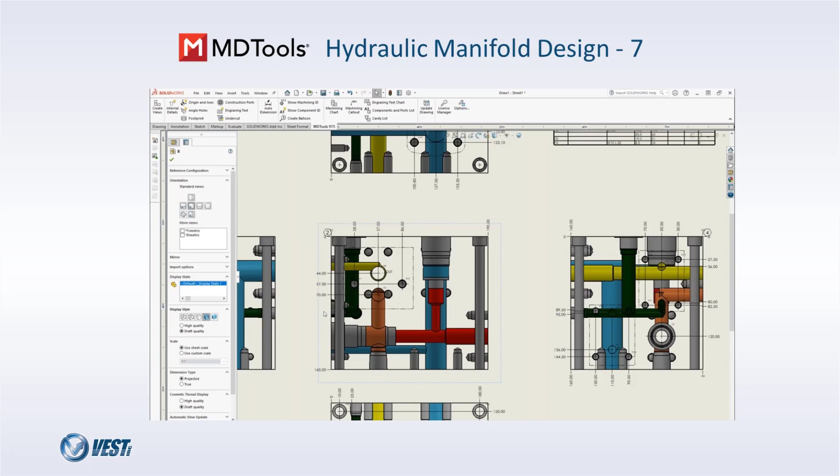Today we'll do a demonstration of MDTools. I will use MDTools on Solidworks as promised. I will try to alternate Inventor and Solidworks versions from next webinars. And like I did in the last demonstration, sometimes I'm starting from HyDraw, other times not from a schematic.

Although I always have a diagram made on HyDraw CAD, today I designed this block without the intelligence that is built in HyDraw CAD. Let's just take a look at the diagram so we understand a bit. It's not complicated. It's just a manifold we normally put on a power unit where we have the pump inlet, a check valve, a relief valve on the pump.

We want to filter, so we have a pressure filter. That's an Italian MP filter, FHB 050 footprint. I want an accumulator. I just had a 3D model of an accumulator, so we will see it assembled on a 1/2 BSP port. We have a shut-off valve, a ball valve, allowing for us to discharge the accumulator if

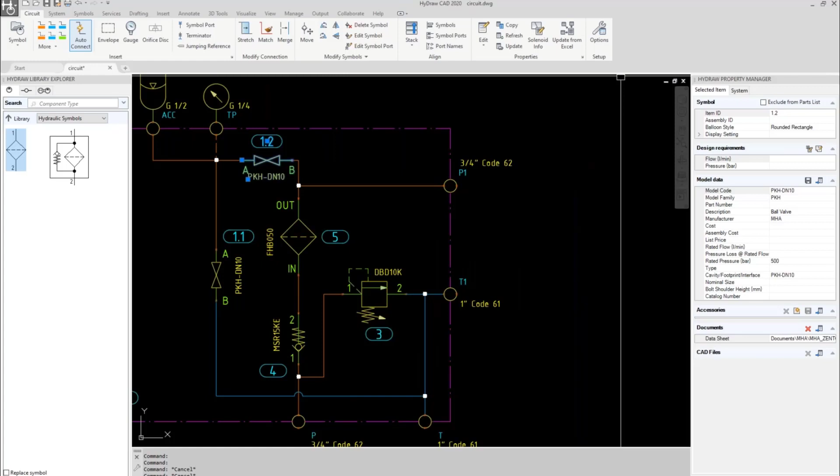we need. So basically we have two MHA shut-off valves, and then we go into the manifold or distribution of our power unit. So this is not complex stuff. Usually we have this kind of manifolds in power units. So we start designing our manifold, and we go in MDTools. I'm using MDTools 975 in Solidworks.

It's still in beta, so I know we have some bugs, but hopefully I will not jump into them during the webinar. But I trust the software, and I did a lot of testing with it, so it should be good. As always, we start with a block, and so the first command is block. Although you could select material and cross sections by material, let me just quickly start with, let's say, 200 millimeter by 160 by 160. The filter is not that small, so then we will try to see if all components fit.

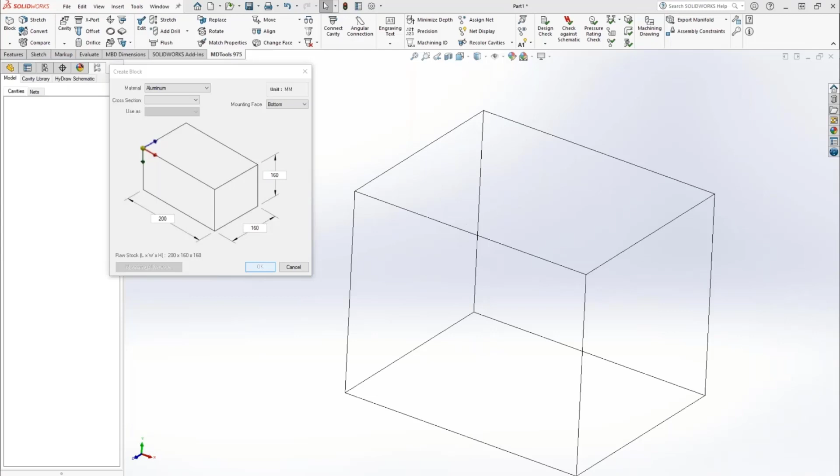Since this will be a power unit mounted manifold, I imagine that my power unit reservoir will be down here. And so I want a through bolt hole for my manifold so that it will be easier to fit into my power unit. When you design manifolds with through bolt holes, it's always tricky to find a place for the through bolt hole. So a good recommendation is start from the bolt holes. So I start with, let's say, M10. With this command, we can just start with adding bolt holes.

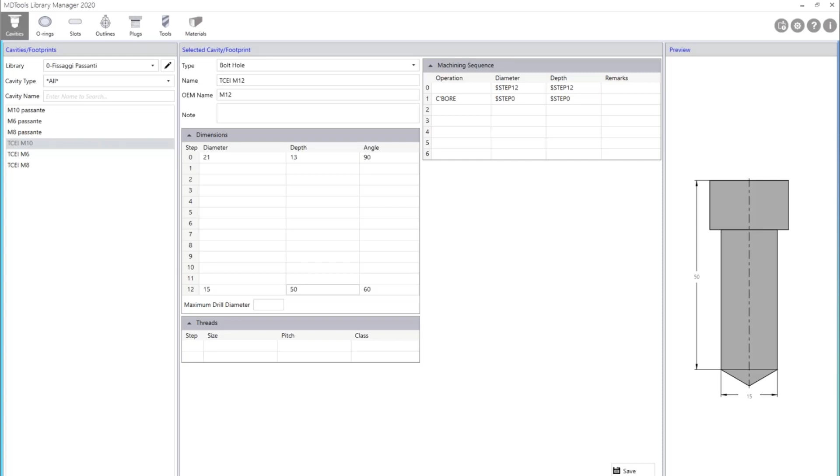I take an M10. If you don't find the cavities you need, just quickly go to the library manager and add. So let's say in this case, I don't have M12. I can go to my library manager. And let me get back here. I go to my mounting holes. I take my TCEI M10 and I can make a TCEI M12, and the diameter will be 21 by 13 by 90, and the diameter here is 15 by 50. And we can do a save as. So by doing this, we quickly create all the geometries that we need by starting from existing cavities.

So basically now, if I create my bolt holes, I will find also the TCEI M12, but I want TCEI M10. 4 pieces on the top face, and I want just 10 millimeters from the edge. When you click OK, now the drill holes are placed. I am now working in feature mode. In the new 975, you will see a faster feature mode. And if we move to the SolidWorks browser, as you can see, we have different icons. We are using the advanced drill hole feature that is available in SolidWorks.

Although this is usually faster in designing than 970, I still like to work in virtual mode when I start the design because I really like initially to try different configurations. So remember, if you want to switch between virtual and feature, you just click convert. You have a warning. This will jump to virtual mode. And if you want then to jump back, you click again convert. The difference, as you can see here in the virtual mode, is that we have bodies and not features. This is a lighter mode which allows faster operation. So let's start placing components, and then we will switch to feature mode later.

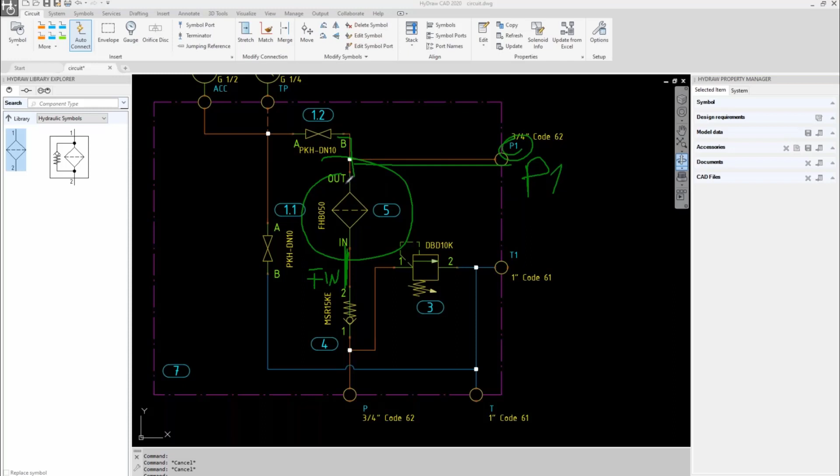So my filter is here, and let's say that this item will be called fin, filter in, and this net, the outlet, will be called P1, just with a port name. So the filter inlet will be called fin, and the outlet will be called P1. So with this in mind, we go here, take our filter. So the inlet will be filter in, the net name is fin, and the outlet is P1.

If you keep using standard net names, they will show up as a drop down here. And these net names can be defined in the MDTools options. Under the cavity color, you can define net names and also specific color for same net name. It's very easy, so you can just click new and create a net called drain and specify a color for that net. Anything you add here will be added and will be available in our net.

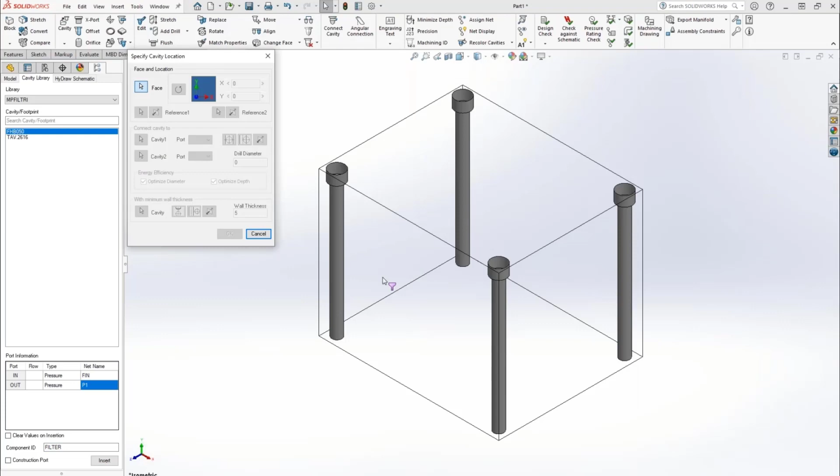So now if I take a cavity, as you see here, I will have also the drain available. Let's go back to our filter, MP filter. So we say that the net is fin and the outlet is P1. The component is filter. Usually we use the item ID in the diagram. In this case, I just use a text filter. It will be easy to find out in my browser.

I place my filter in the drawing and I can select a position, let's say 60, 70 millimeter. It's better always to start with precise position for cavity, so it will be easier to have exact position for all the components. Now, there was a check valve before the filter, and it was a Rexroth MSR 15. So we find this cavity here, and we go to the MSR 15. So a check valve has 2 ports. The inlet is coming from the P from a flange, and we call that net P, while the outlet is going into the fin, so the filter in.

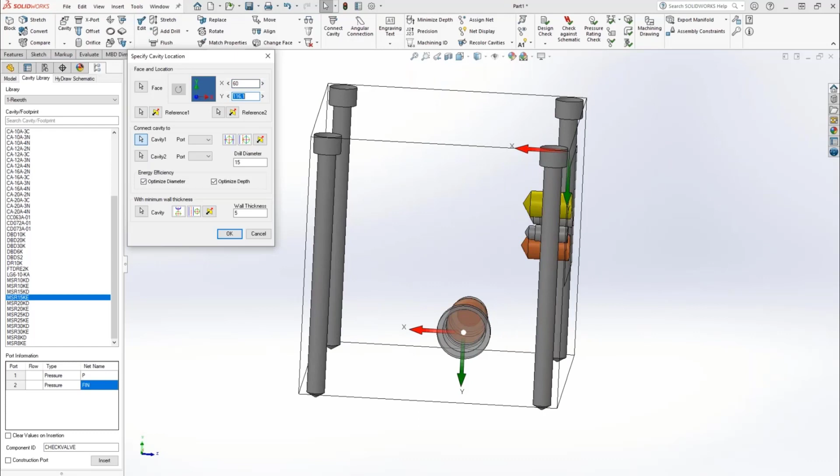Our component is called check valve, and we place the check valve, let's say here. Well, we see the colors. The orange will need to go to the orange, so this position is not bad at all. Let's leave it here, and we position at a good position, let's say 60 millimeter, too far, 50 millimeter, 120. I see that there is not a good alignment here.

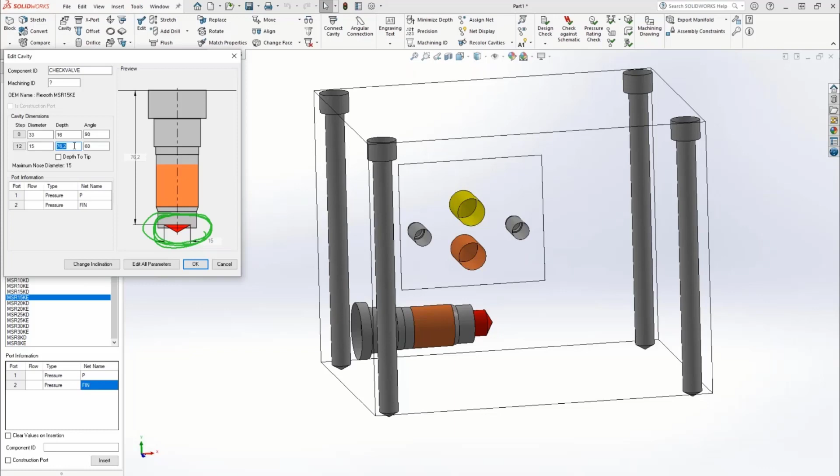This is a check valve that, really quick, we can deepen, sink in the block, so we can add it and make it, let's say 16 millimeters. When you exceed the spot face, as you can see here, we have a warning because the spot down, the bottom drill must be increased. So yes, we will make it 150 millimeters. And now we have sunk our cavity. Looks good.

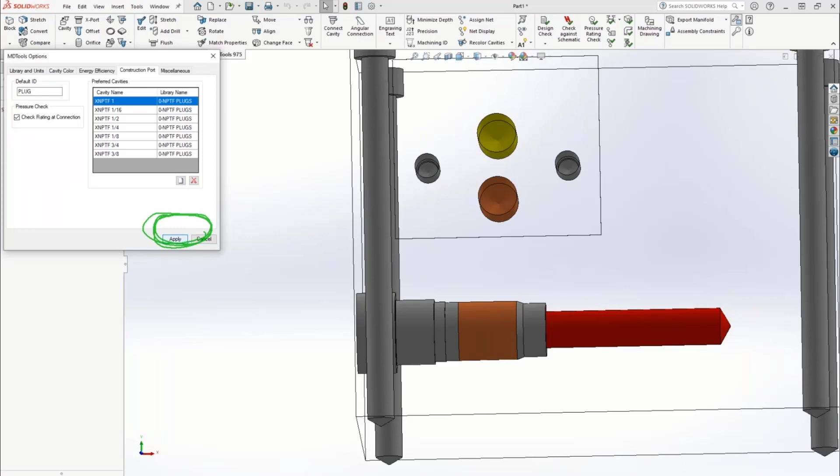So for my design, this is something I never did in other demos. I will use conic plugs, NPTF. So in my construction plugs, in the settings, I will select my NPTF plugs, all sizes, add. So in my design now, for all the construction plugs, I will use NPTF. Another setting that we have in the library is that for the plugs, all my NPTF plugs do have a corresponding SolidWorks file. This works also for Inventor, no problem at all.

But as you can see here, we have linked the cavity with the corresponding 3D model. So we expect the automatic plug assembly at the end of the design process. Now we need to connect the orange one. So we make a construction port, connecting this, and we position automatically. It is taking half an inch NPTF. That's good for the size. And I put it here in the center.

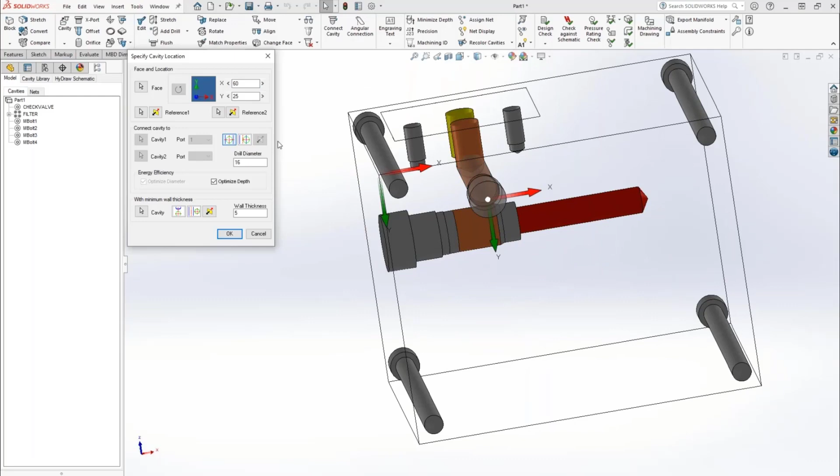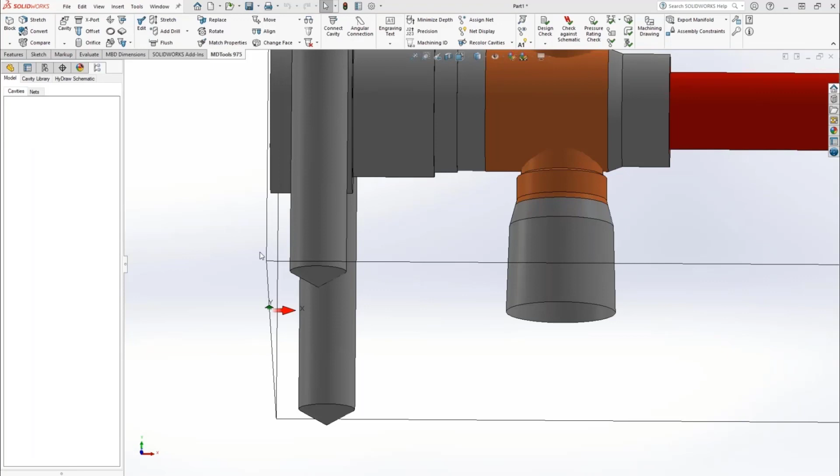And I want to center with the other cavity, so we can reference to this cavity at 0 on the Y. And as we see here, there will be a possible intersection with the dead area. So let's move on the X by 1, 2, 3 millimeters to the left. So now we have made our connection, orange to orange. It's not aligned. If we want and we have room, we can align these two cavities. So then we have a center to center.

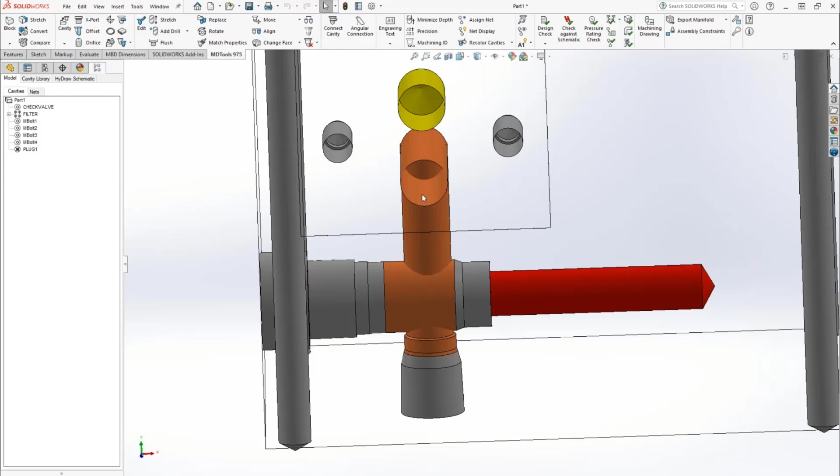As a general recommendation, when you design a block, wherever possible, always make center to center connections. Your manufacturer will thank you. Sometimes it is not possible, so of course there is always a compromise, but really wherever possible, try to make center to center connections.

The inlet of our check valve is a flange, so we go to our flange library. That was a 3/4 code 62 flange. The net name, now that we have some nets in the block, we can switch off the show all. So when you switch off show all, MDTools will show you only the nets that are available in your block. So I take the P net and my port is P.

And we insert here, we can rotate it, and we can position reference to the center of the cavity. As you see, when we click reference to the center of the cavity, dynamically we have a new origin here. And to make it aligned, just use the XY. So here you put 0, 0, and now the drill is in the center. You could control the diameter. 19 is good for my flange, so nothing has to be made here.

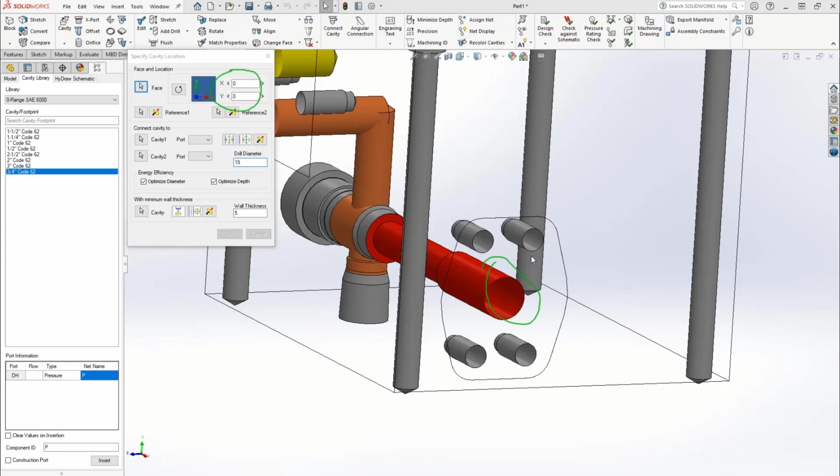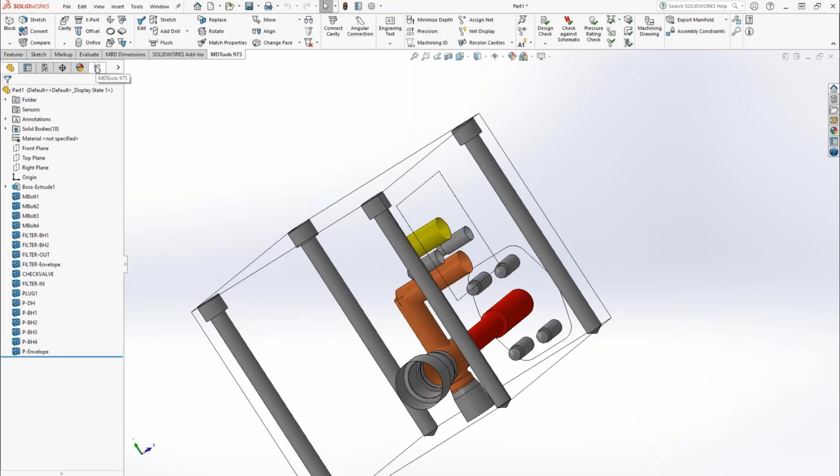Please remember that in virtual mode, we don't see the real geometries. We see the drills, entire drills, because as I explained before, we use the multi-body technique. So basically every cavity is a unique body. We will transform into features later in the design.

Let me save my block, and let's put it on the webinars, MDTools. That's our, okay.

And now we have also the tank lines. So we imagine that there will be always our reservoir down here, and reservoir means tank line. So let's plan to put the flange down here, the tank flange that will be directly connected to the tank. But after our manifold, there will be other needs, maybe another manifold somewhere else.

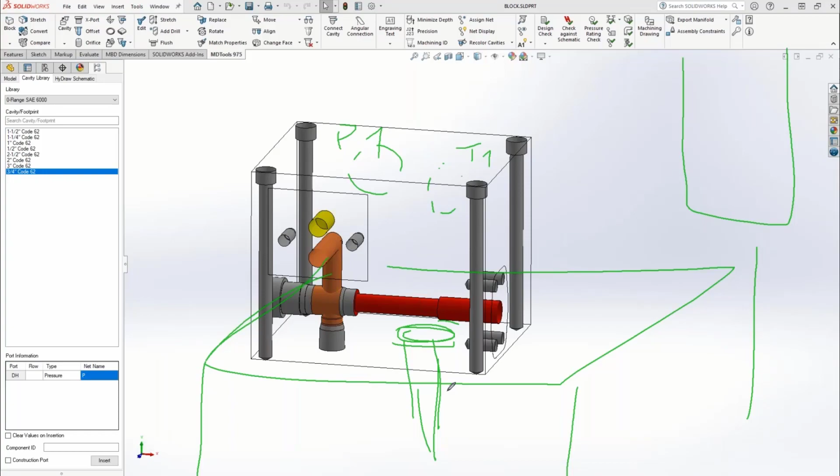So on the back of the manifold, we will put our T1 and also our P1. If you remember the schematic that we had made, we have the tank going to the reservoir, but then we have T1 and P1 that will be connected somewhere else in our system. So we need a good layout for these ports in our manifold. So let's plan to do it.

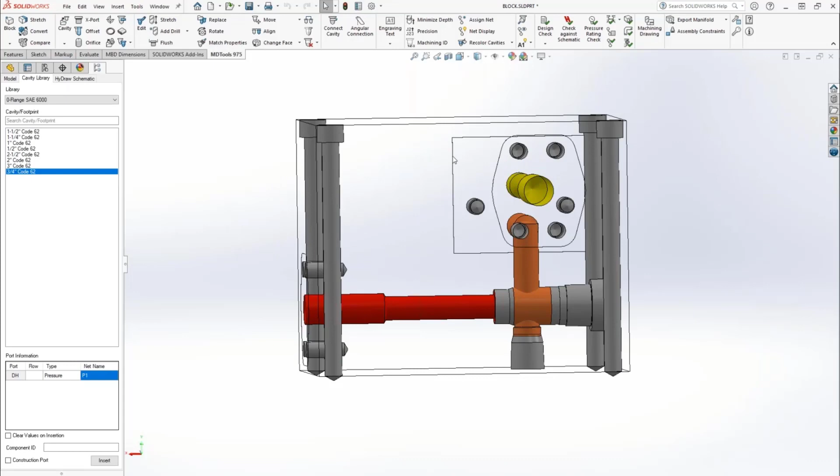We take our P1. So the net is P1 and the port is P1. And we place it on the back face. Yellow with yellow, so it makes sense to put it in the center. Let's rotate it and reference to the other drill in the center. And we can make the connection by stretching one drill.

Please remember, connect cavity is not working with the coaxial connection. It will work only with the 90 degrees connection. So when you want to connect two parallel connections, you must use the stretch drill command.

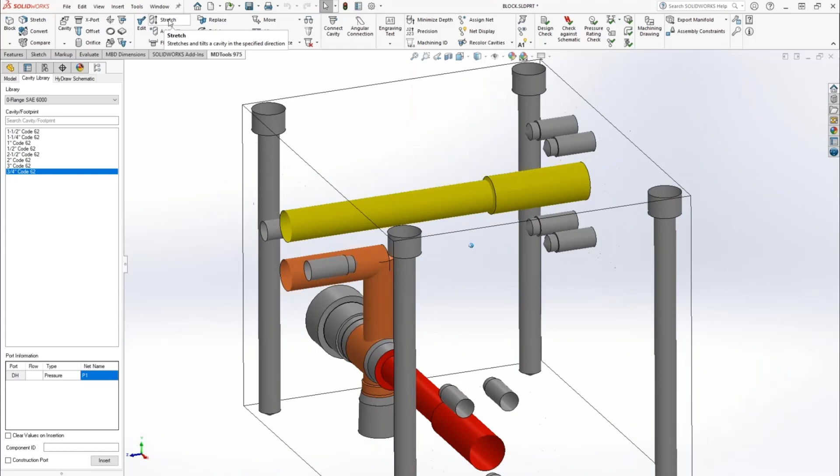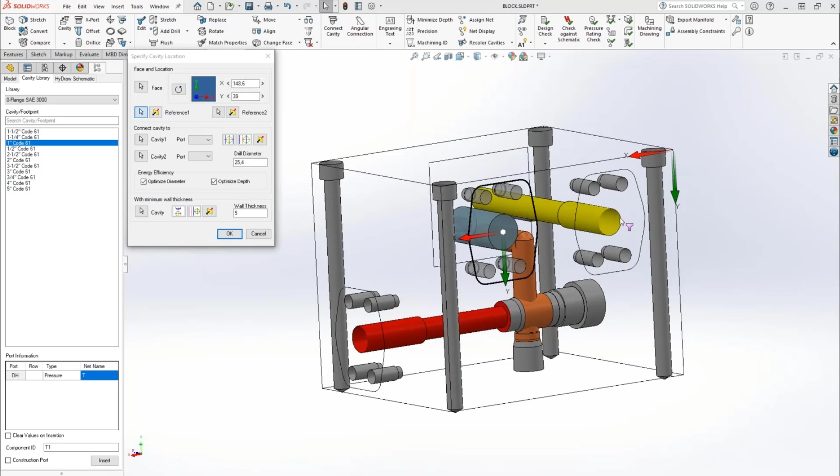We go to the SAE 3000 and we take the 1 inch 61. The net is tank, and this is T1, which we put somewhere here. Let's put it aligned to the other cavities, rotate it, and we put a reference to this cavity at 100 millimeters, 0. That's too much. Let's keep it 80 millimeters.

So in industrial manifolds, sometimes we really do not pay too much attention to how small the block is, because it's very important to be able to maintain, to replace items. So sometimes the industrial manifold is larger than what you expect on compact hydraulics, because really the need is different. Here we don't mind if there are some kilos more in the manifold.

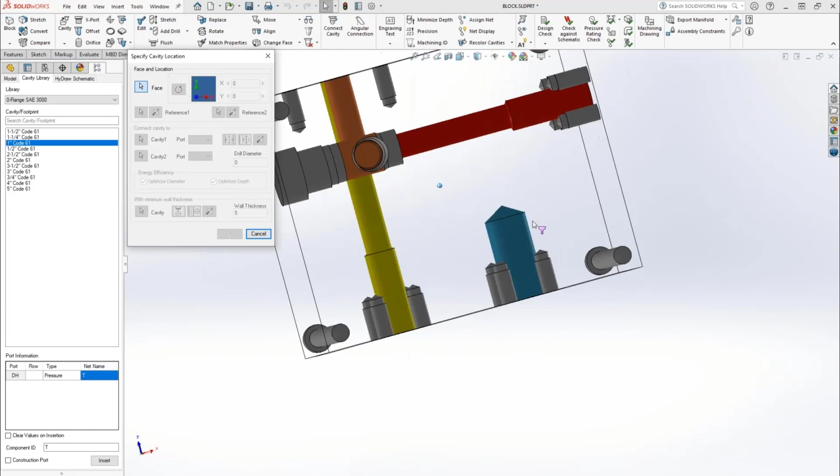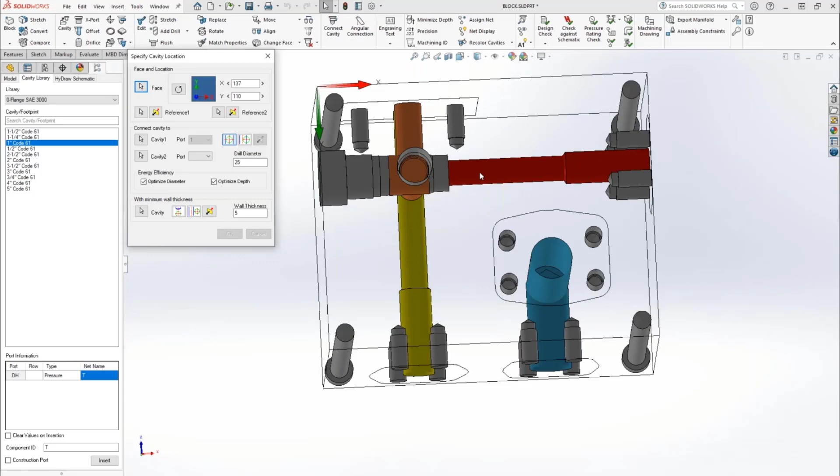And let's say T1, that's tank, our tank. As I explained earlier, we want to put the tank down here. We want to connect to the tank line in the center, and on the Y we put it 110 millimeters. Always pay attention to X and Y. It will save time with modifying later the position of the cavities. So that's our tank line, and that's good.

Now we have made the skeleton of our block. We have the pressure entering in the check valve, going to the filter, goes to the system, and then we have a tank returning back. We have a relief valve on the pressure line. That's a Rexroth DBD10K, which is basically connecting the P line to the tank line. That's our relief valve. We put it on top here.

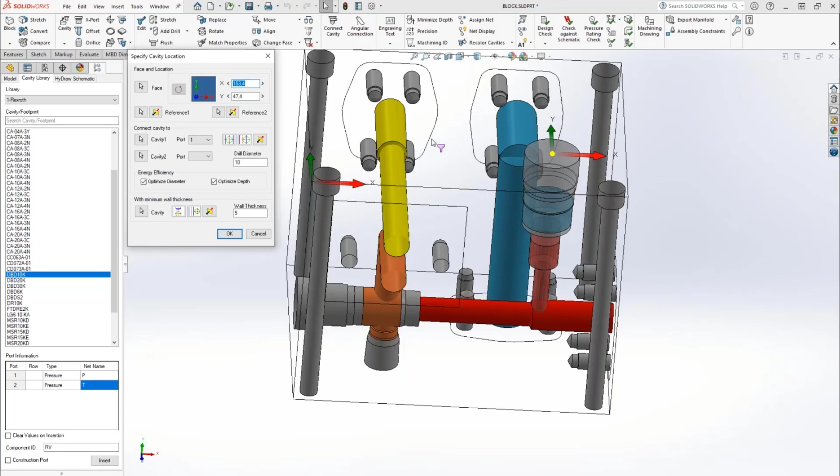Let's connect. And again, we can consider using the flange to connect here. So we can just position it in reference to this drill. And as you see, always dynamic change of the position. X we put 0. And on Y, we want to change reference here, so to have exactly center to center to the check valve that is down there. Okay.

Now, instead of adding a construction port here, we want to connect directly the flange here. If we just connect, this will reduce the drill of the flange, which we don't want. So we want to add an additional drill to our cavity. As a generic rule to help manufacturing, we want to extend the large diameter in order to get out of the first intersection.

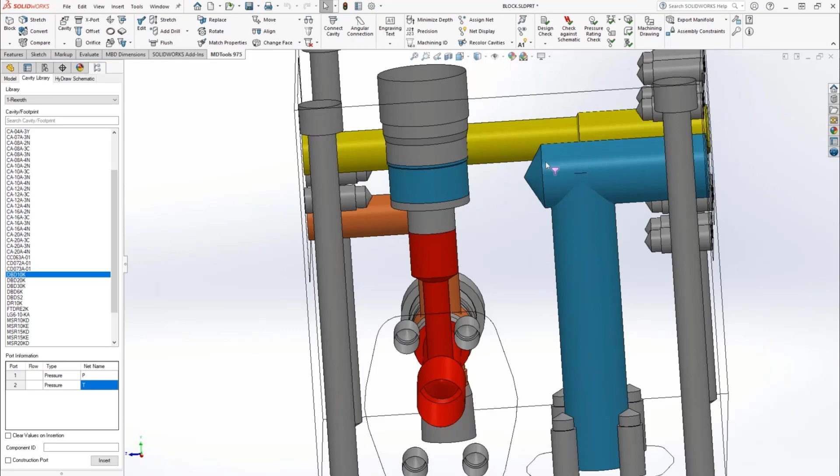And let's say we want it to be 65 millimeters deep. Let's make it 25, the diameter. So we want to extend, and then we started with the smallest drill. That's a good recommendation, because we want to have a clean center for the next drill that is coming in the operation of the block.

We add a new drill for this cavity, and we don't mind which size. Later the destination cavity will be controlling it. Let's make it 15. Now MDTools is asking where I want to position this drill information. So let's leave the drill operation here, and it will be combined with the primary drill of the footprint. The depth, let's make it 10 millimeters. No problem. It doesn't need to be precise here, because later we will do the connect cavity.

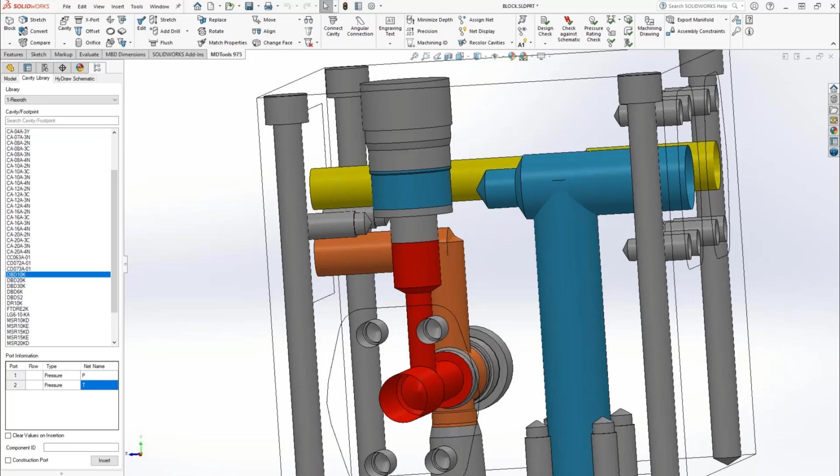So we click OK. Now MDTools is transforming that cavity into a multi-step cavity. In fact, with edit, now we see that our profile is made of 2 different drills. And now we can do the connect cavity here in the center.

And that's okay. Let's check the diameter. Let's say that we want to have a 14 millimeter diameter in our drill, but as you see, the destination drill is conditioned by the cavity. That's good. Let's move quickly, otherwise we run out of time.

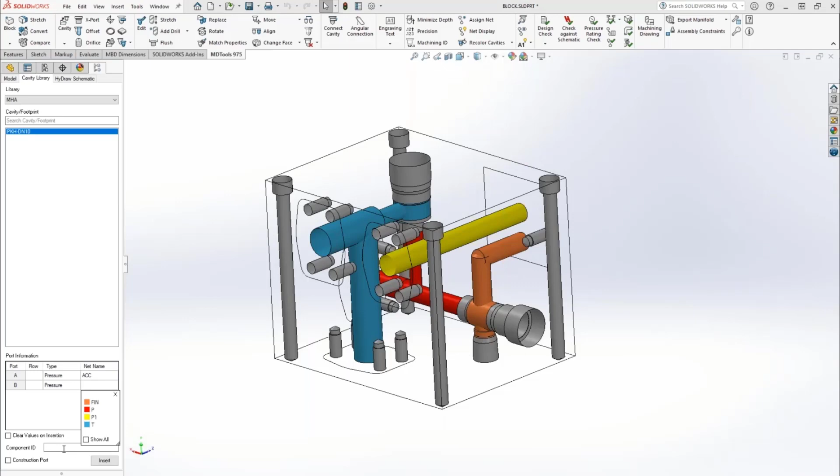We had ball valves, MHA. The ball valve is the N10, and it's connected to the accumulator. So net A is accumulator, net B is P1. It's the yellow connection, and that's the ball valve 1, and we position it here. So we want the accumulator to be on the top face, so we need the top face to be free. We put the accumulator next here.

So let's rotate, and let's move this ball valve. So we can drag the position and put it here, and let's make it 80 millimeters. And we want to connect these drills.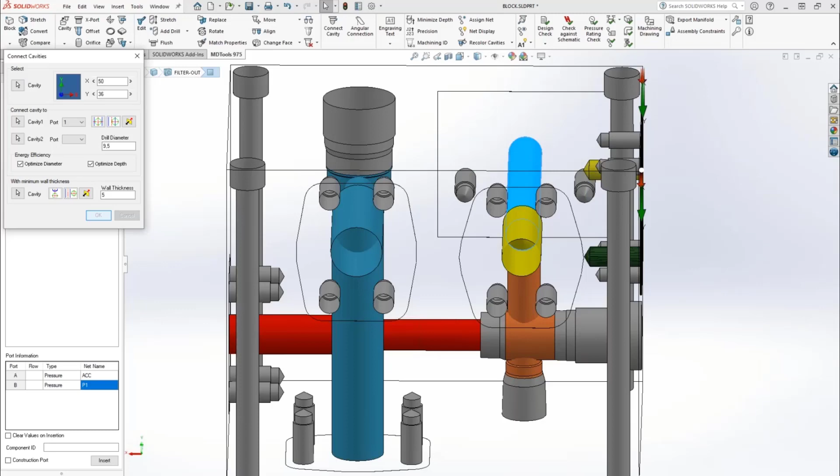The green one will be our accumulator, which we want in the center here. So let's go for a BSP port. The accumulator was 1 inch. The net is always accumulator, and we want the accumulator being here. And let's leave it at 25, 80 millimeter, 90 millimeter.

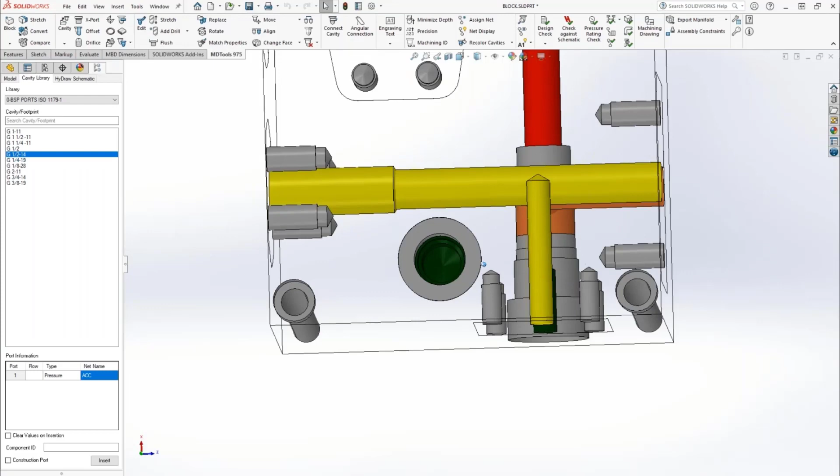And we want to connect them. And here we don't seem to be able to find a good room, so let's try here. This looks better. We want a construction port here with this drill, and it's a 1/4, should be okay. And we position it here. There is a bolt hole there, so let's move to the right. And we click OK.

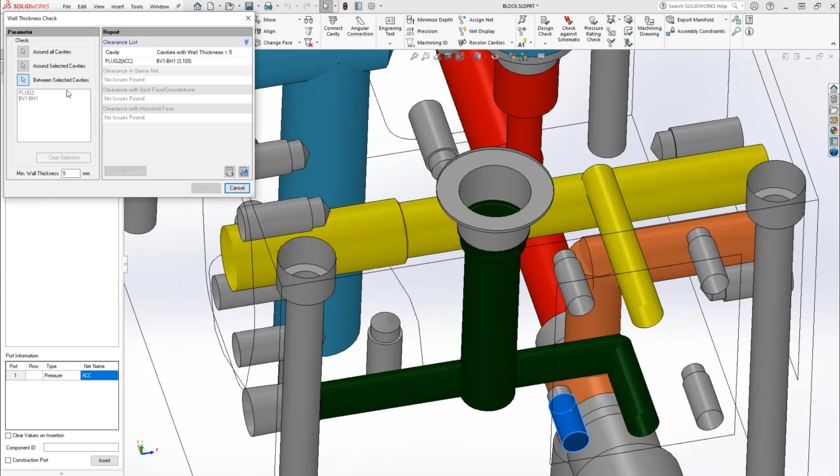If you want to verify the wall thickness, you can just do the wall thickness check for all the block or between or around selected cavities. So let's make it between these two cavities. We want to verify if there is at least 5 millimeters. And here it is 3.1 millimeters, so that's not good. So we need to get some more material here.

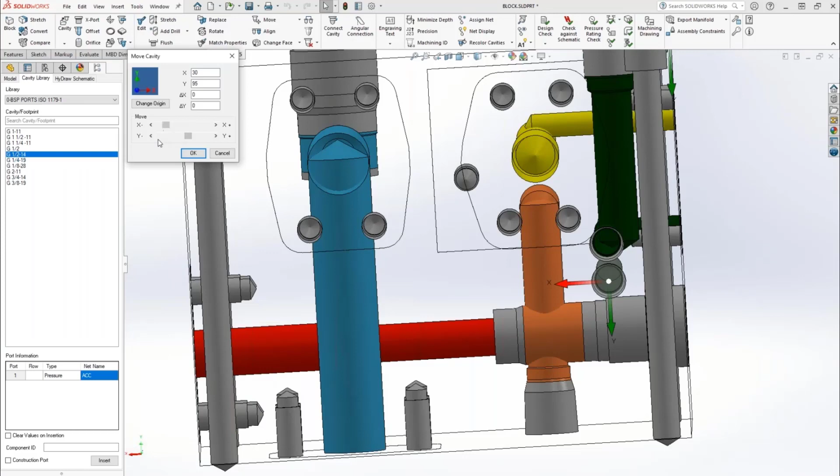So a technique could be we move this drill down, not too much, and we make an inclined drill. So we take this, stretch and incline. We go with inclination to this drill, and let's make it 20 degrees, 16 degrees. Now this looks better, and we can stretch this drill and go and make the connection here.

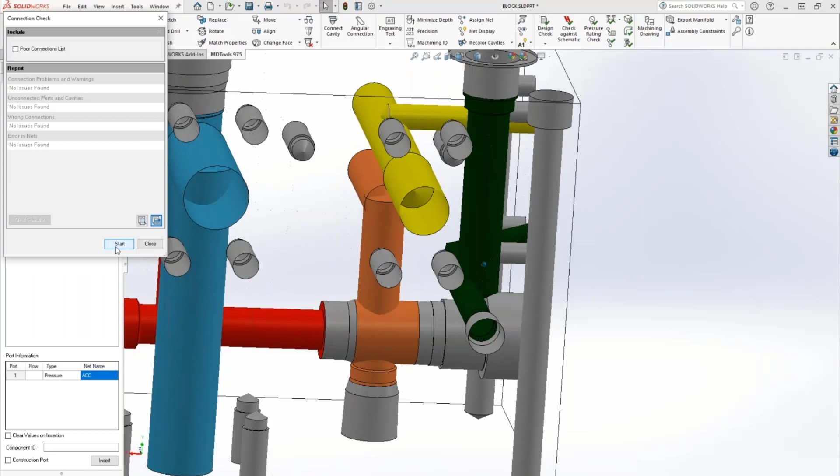Let's check our schematic. So we do a connection check. With a connection check, we can verify if we made mistakes. Graphically, we don't see any mistake here, but by mistake, there could be an intersection between a cavity with a bolt hole. So like in this case, I am touching bolt holes. So when we do a connection check here, then we have problems. A bolt hole and a port are connected. There are other mistakes that we can make, and let's fix it.

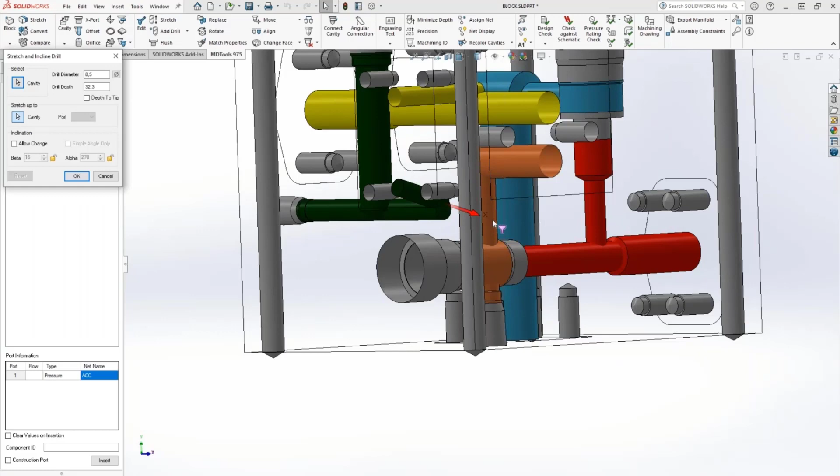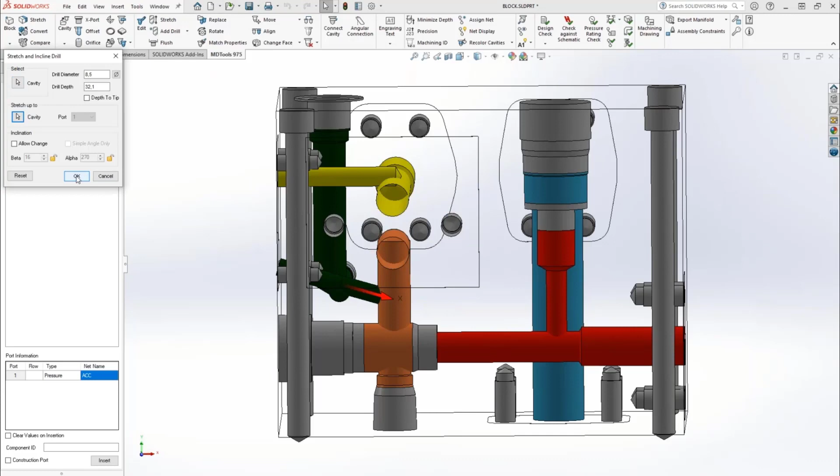So for instance, we could have nets that should not be connected together. So like if we extend too much the green drill, then if we do the connection check, this will end up with a wrong connection. So two drills belonging to different nets are connected. Let's get back to our connection, stretch up to this connection, and we make it 32 millimeters. That's good.

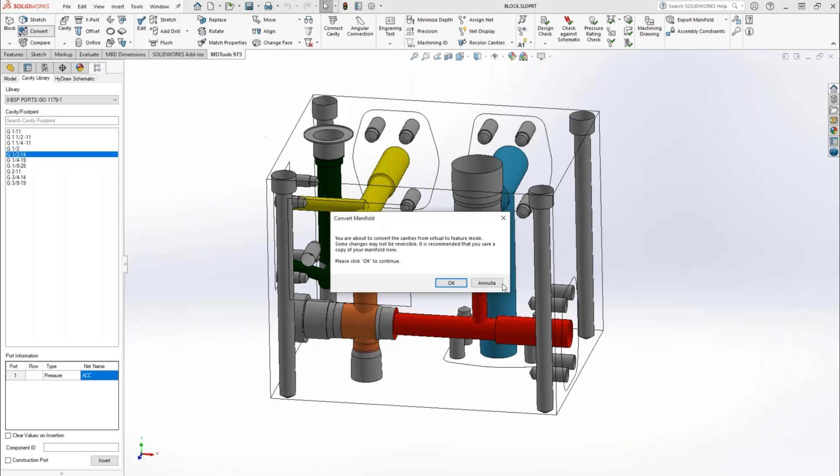Let's start placing the components. We still miss another ball valve, but let's try to make the feature mode; we want to start building the assembly. So to make the assembly with the MDTools rules, we must convert to feature. So when we click convert, MDTools will ask you if you want to convert the block, and we are going to make our feature block. So this operation will take a few seconds or a few minutes, depending on the complexity of the block. We improved a lot the speed in conversion with 975, so this will not take much.

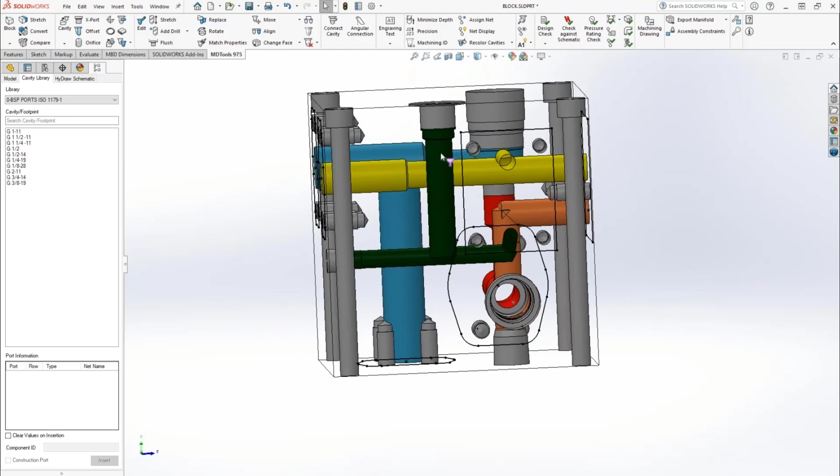And if you remember, we had a ball valve on the accumulator that was connecting to the tank. Actually, that ball valve could fit here, and then we'll check with the lever in the assembly. But let's start making the assembly. So we save our block and make the new assembly. And then we get back to the design.

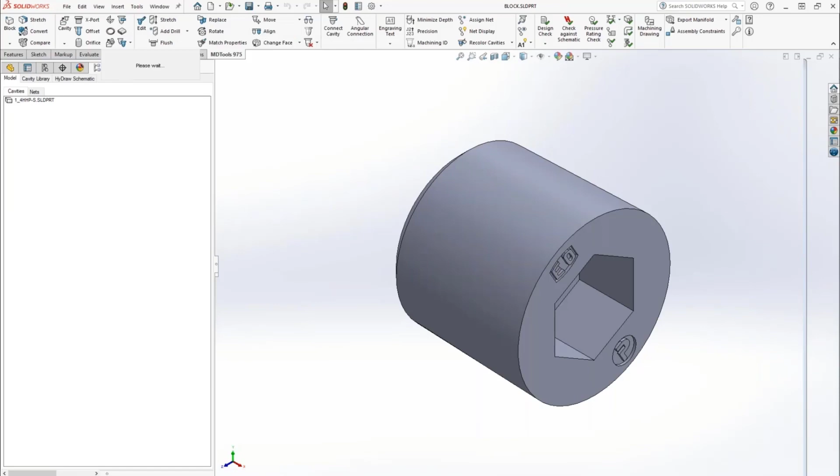MDTools provides commands. As I showed you in the library, I have linked the 3D model of the plug with the plug cavities. So if we run assemble plugs on our manifold and take the block, which is here, now MDTools will find all the cavities that require a plug, and will just load the plug in the corresponding position. This block has not many plugs, but for a block with many plugs, you will save a lot of time. So only 2 plugs here. One is here and the other is down there.

Now we want to assemble ball valves, filter, relief valve, and so on. So let's do it. We can do the assembly interface. And for the check valve, we want to look into the Bosch Rexroth M-SR15KE.

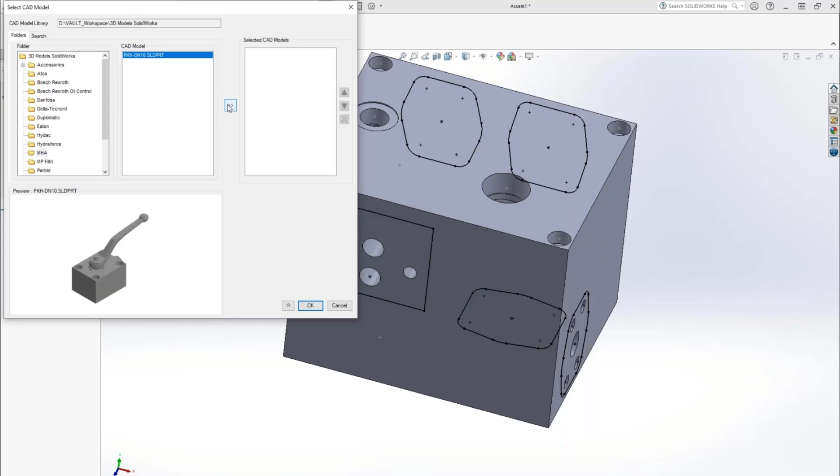For the ball valve, we need the MHA PKH. And on the accumulator, we want a fitting G1/2, and also we want a HYDAC plug SBO. This is one I used in the past for a design. Okay, and the filter, Select CAD Model. I have an MP filter.

When you are done with all the links, you can click update. And now MDTools will take the components. When loading with the MDTools interface, you will see each file loaded twice. No worry, it's just an integrity check that MDTools does, and then it positions the components into the assembly. It will, in any case, save time because all the components are automatically mated and assembled to the block. So now it will start placing the components.

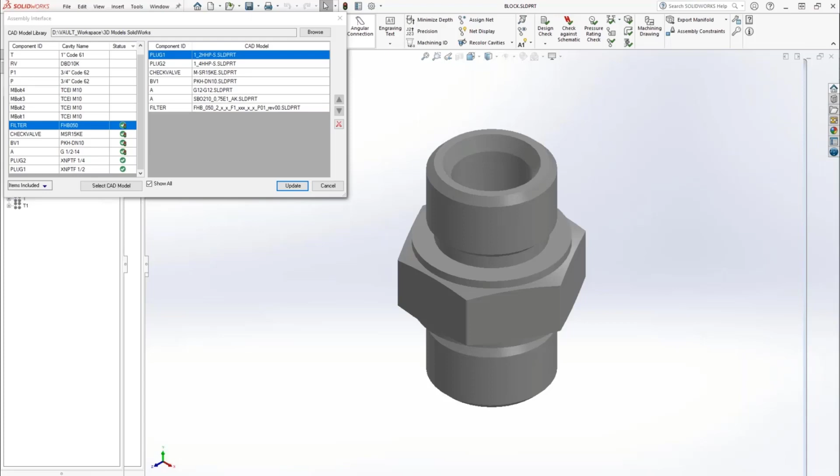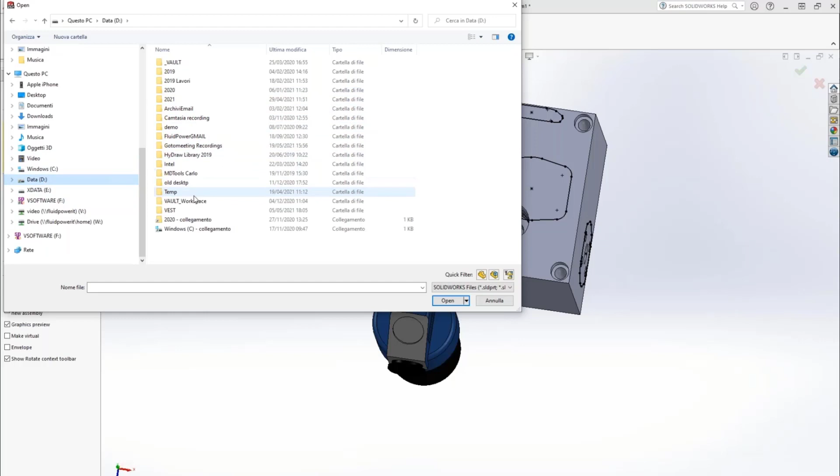Okay, this is our assembly. If you want, you can still assemble with the standard SolidWorks commands, so you can insert components from any location. Like in this case, I have all the 3D models in my Vault workspace, Rexroth. Of course, everything that you do normally with SolidWorks will work, but then you will need to mate the components. So maybe selecting and placing could be faster, but then you need to mate components.

So you need to find the surface and apply, and then, not the dot, I want to mate again the cylinder with the cylinder. So technically you can use any SolidWorks command to assemble.

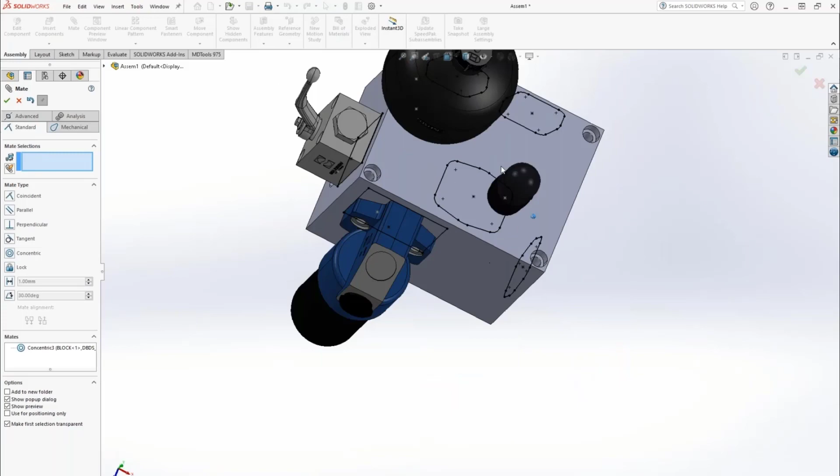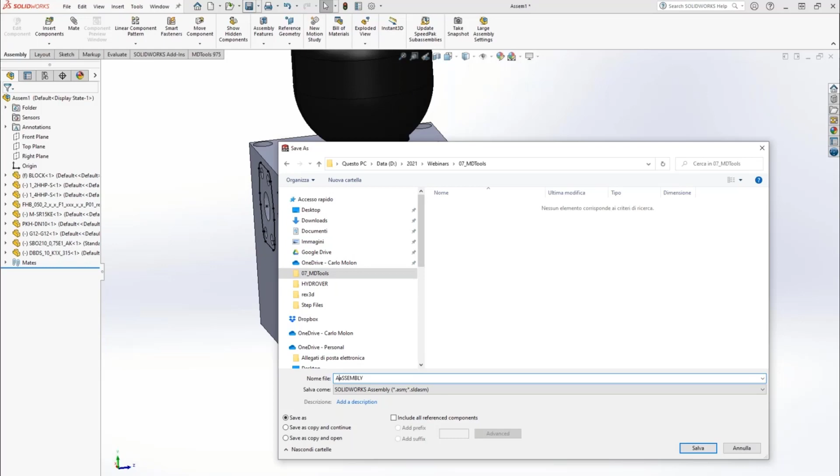Our block looks okay. We forgot a ball valve. So let's save the assembly, and we go back to our design folder. So we can go back to our block, and we can place our MHA footprint. And now this is connecting the accumulator to the tank, so it's to discharge the accumulator. And the component is ball valve 2, which we can position here.

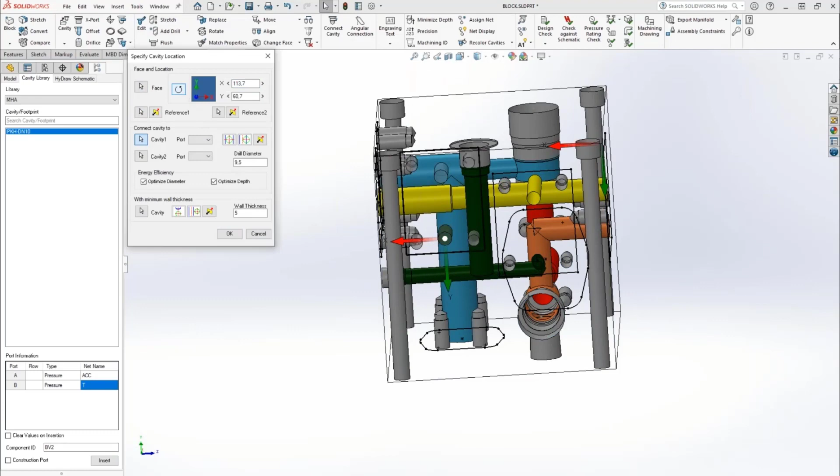And let's rotate the ball valve. Let's try to move it down. Actually, we can connect directly with the green and move it this way. Let's see if we can fit it exactly down there. We can align the drills, always with the idea that we should make center to center connection, and we can make the connection here.

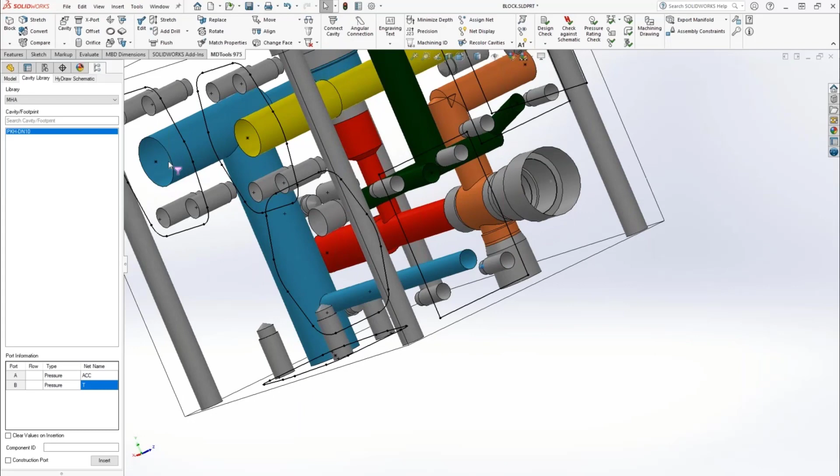We go back to the assembly, and yes, we accept. No major error. We didn't move anything in our assembly. Now we want to assemble the other ball valve. So always with the assembly interface, we take the other ball valve, MHA, and update. So this will automatically assemble the other ball valve. Now the lever is not in good position.

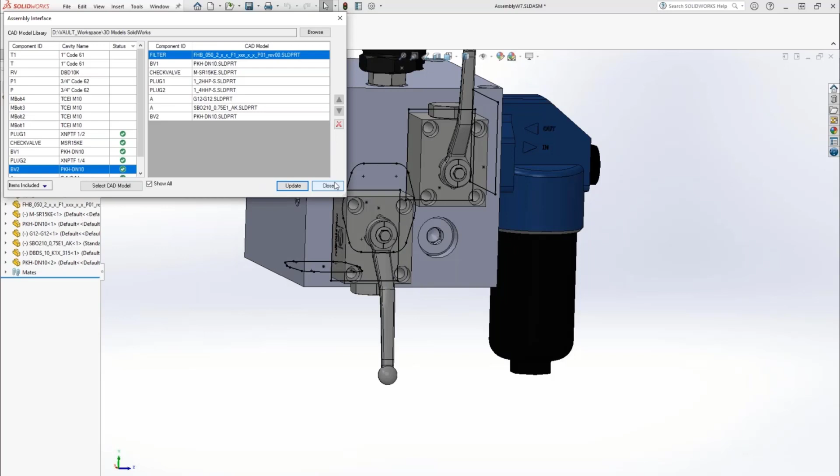So I'm using now a functionality of SolidWorks. I made some configurations, so I can select a configuration with lever 180. So this will apply the lever on the other side. And this is a standard SolidWorks component. So this is a demonstration that it's really integrated in SolidWorks, so whatever you do with your components can be done. So here I want the lever at 270 degrees. And we leave the levers this way.

We may need engravings on our block. So let's go back to our block. And so with engraving text, we can select a cavity, touch a face, and position the engraving here. So that's, for instance, our T1, which we want to position exactly at 145 and 90 millimeters. Engrave. And so on, we can go on to the other ports. P1.

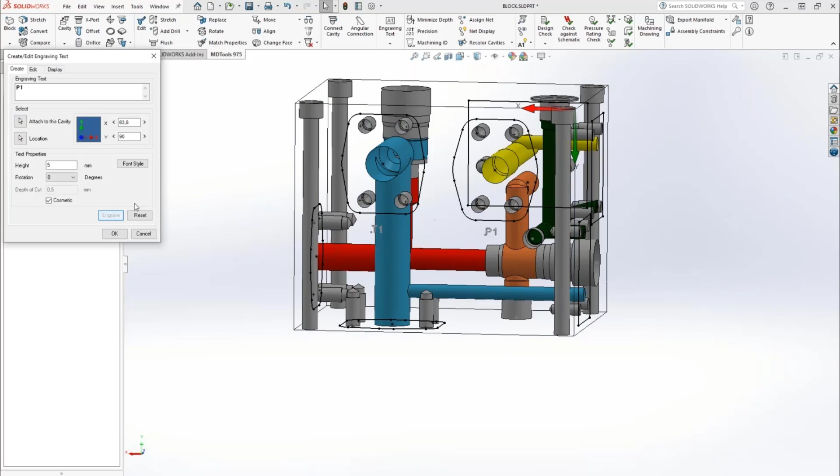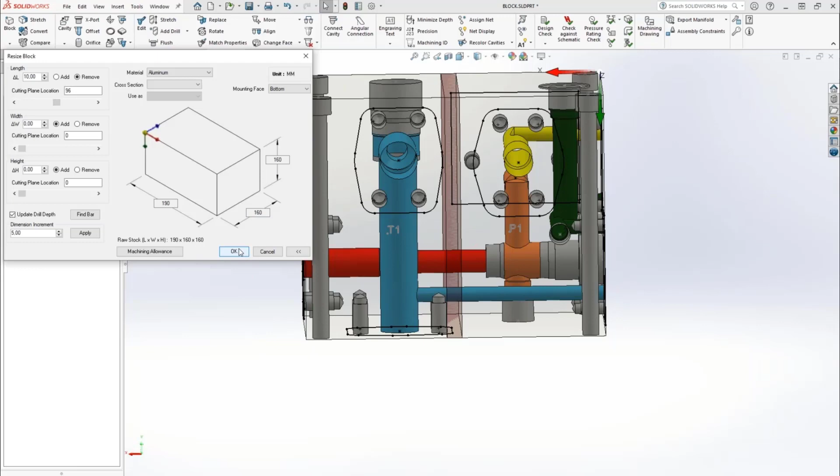Engrave. And so on. We also have the possibility to compact the block a bit. So we can see that in the length, we can remove material. So by clicking the block command, we can drag this and remove maybe 10 millimeters. Let me bring it back. Here I expect some problems, but we will fix them later.

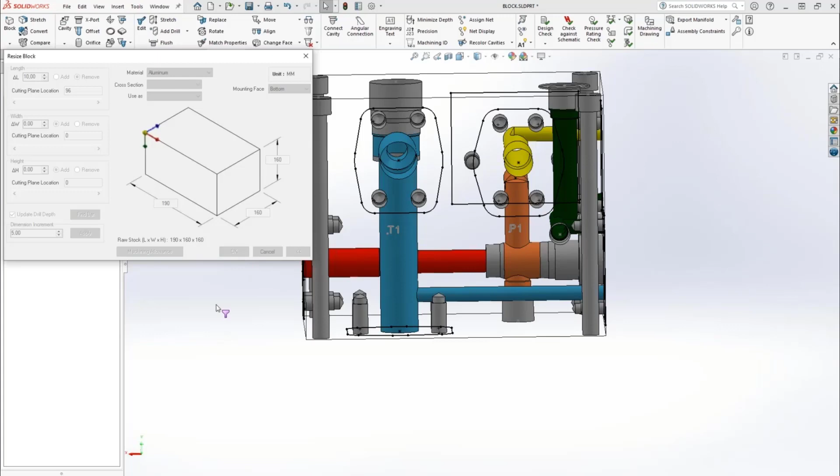So this operation has a small bug in 975 beta. This operation will automatically remove material in between, and it can be used also to add material in between a block, and it will keep a consistent connection. Here it is. So the bug I was referring to is that the footprint is not following. So I just align now these two cavities.

Again, if you see lost colors, just add them, but this will not happen in the production version. And we do connect again.

Stretch. Sometimes you may have, this is typical to SolidWorks, a Revolve Cut feature. In that case, just by adding 0.01 millimeter to a profile, it will have cavities. SolidWorks is a bit particular with zero thickness geometry. So if you find cavities not showing up, you can just slightly change the position by 0.01 millimeter, or just change the diameter slightly, and that will work fine.

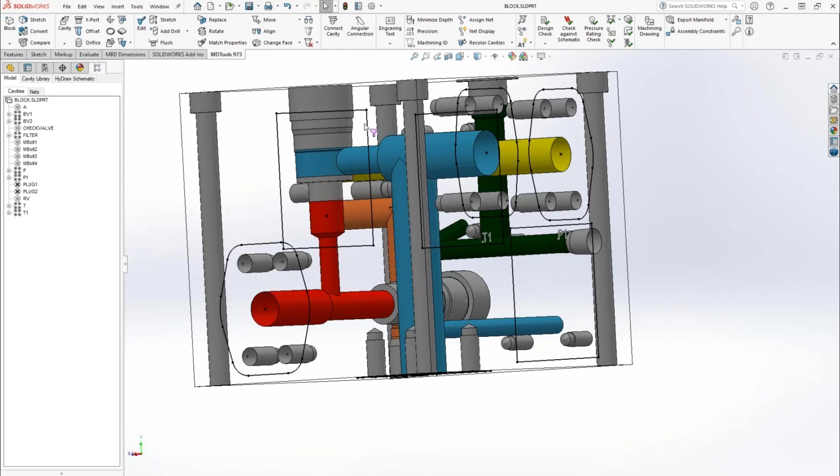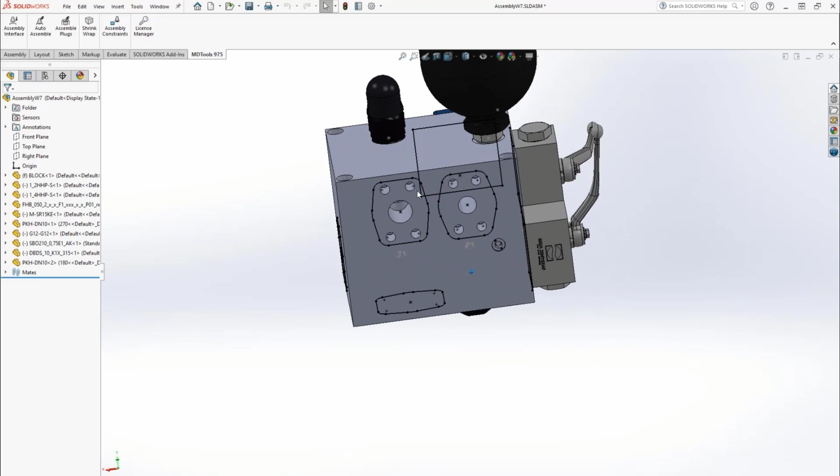So now our block is okay. Let's look at the machining drawing. Of course, if we go back to the assembly, it will require an update. No problem. In this case, we are not doing anything fancy. The block will update. Please remember that if you change face to a cavity in a block, with MDTools commands, you will be able to make that cavity follow the new position in the assembly.

If we want to make the machining drawing, let's do that. We take a paper, let's say A1. We do a create views, and we select our block. And we can define the type of projection. Let's leave these settings as they are. So with this command, MDTools is placing all the views of my block in the drawing. We see that it fits.

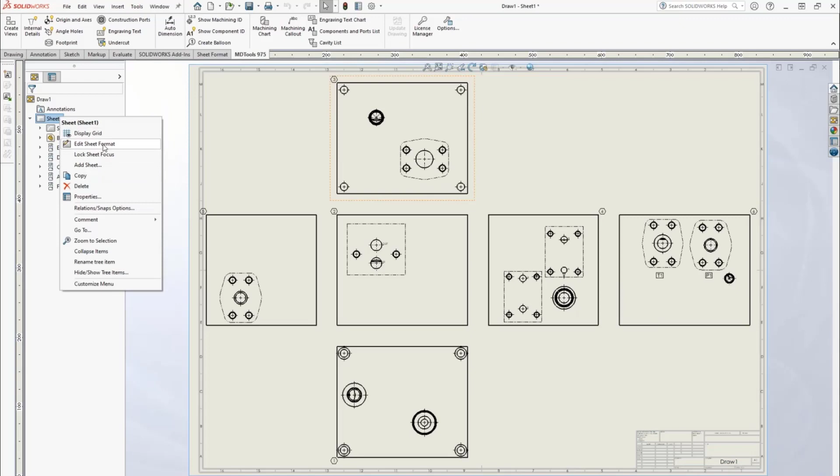So let's change the size a bit. Sorry, not here. That's the sheet. Properties, and we make it A0. So we have room. We can move views all around. All the views that are placed by MDTools have some characteristics: in, out for the filter, A and B for the ball valves or for the footprint. All the construction ports are marked with a cross.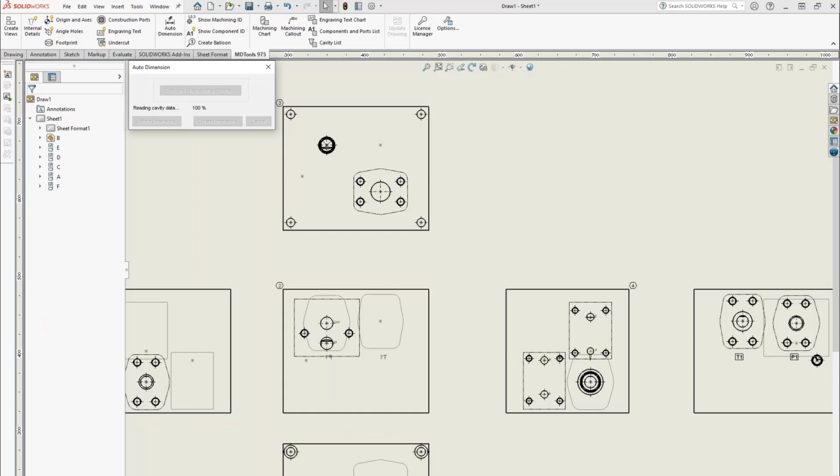We add dimensions with auto dimension, and this will add all dimensions to our block. In this case, MDTools is adding dimensions following your SolidWorks standards, and they are ordinate dimensions from the X and Y origin of the block.

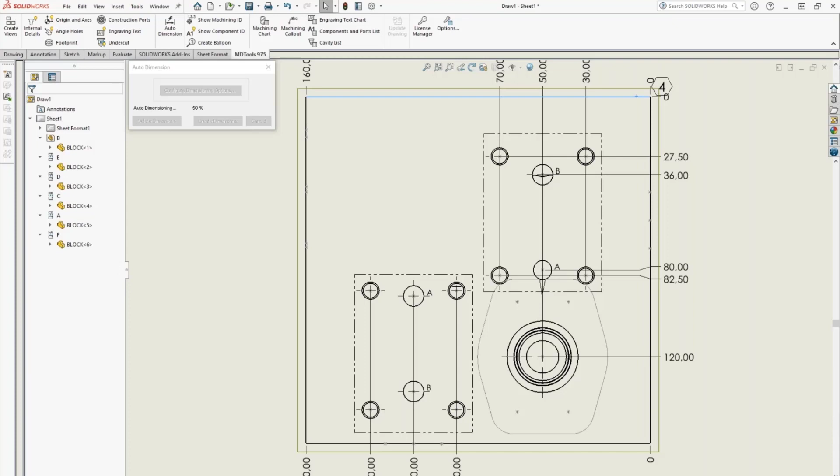As you see, I have good dimensions for my drills, although I did not really focus during my design on the position of the drills. Really, if you pay attention when you insert a cavity and define the position and then use the align command, then you will end up not having many cavities to move in the block after making a machining drawing.

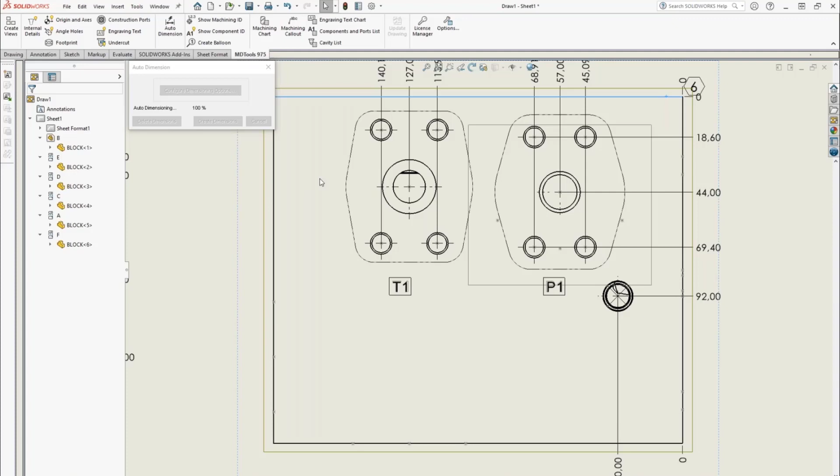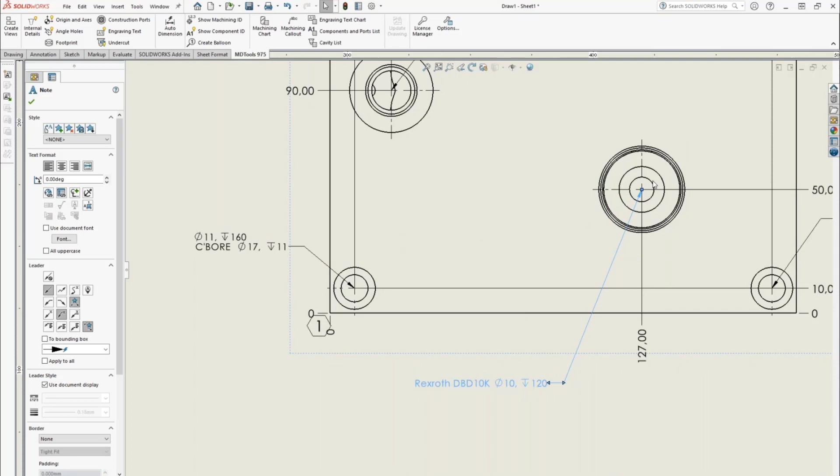Now that the dimensions are finished, we can add machining callouts on all the cavities. That's one option. If you want to view all the information for the cavities directly with leaders on each cavity, then you go for machining callout. The only operation you must do is just move the cavity. So Rexroth DBD10K with a 10mm by 120 deep, and so on. Or if you prefer the drill chart, and in this case, let me opt for a drill chart so I can delete all machining callouts.

Before doing the drill chart, I will move to my block, and I want to assign machining ID. So this command will give each cavity in the block a unique ID. So let me stay with this numbering scheme: a letter for the face, a letter for the cavity, and a number for identical cavities in the same face. So this command will assign to each cavity in the block a unique ID.

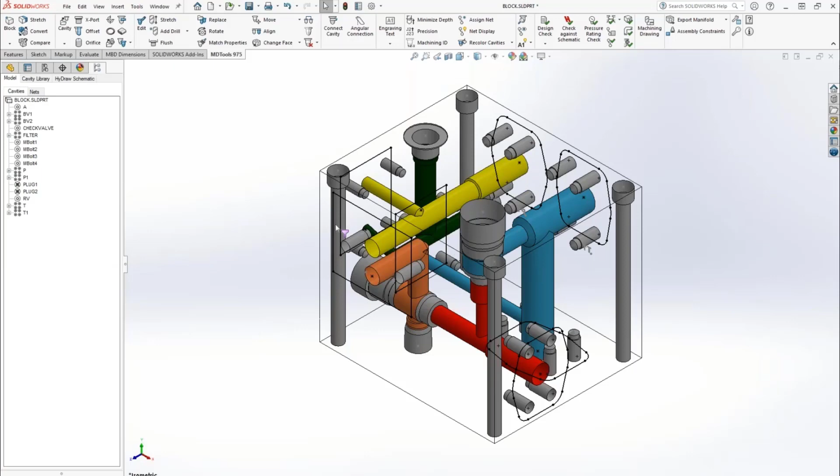We go back to the drawing, and now we have the possibility to show machining IDs in the drawing. We can say show machining ID. So this command will display the machining ID for each cavity in the drawing: AB1, AA, AC, and so on. And each face has a letter, a letter for the cavity, and a number for identical cavities in the block.

Now we can make the machining chart. Of course, it is possible to customize it. I did a webinar recently showing how to customize it. Let's take my default. Let me just verify one option. Okay, the option is good. So I take the MDTools default, insert, and place my drill chart in the drawing.

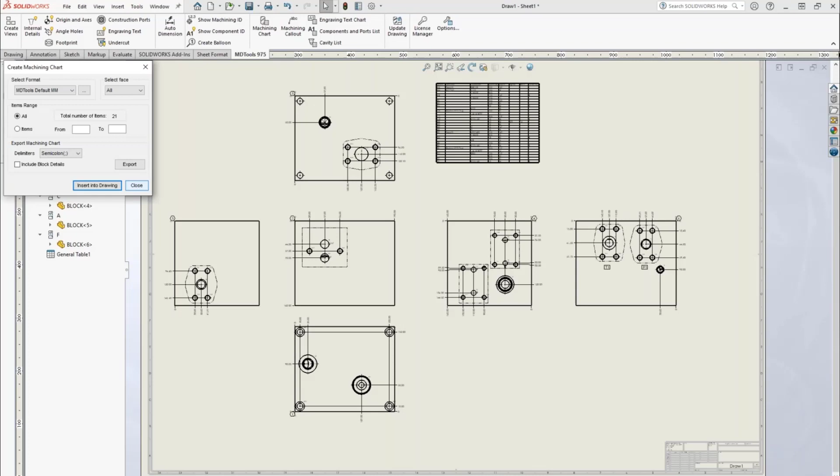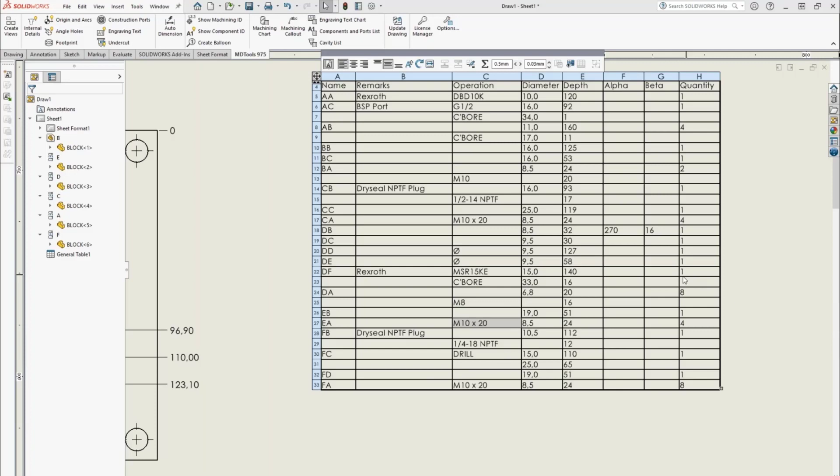So in this case, it's a very compact drill chart because I'm using the quantity. I'm grouping identical quantity. So I have CB, a Dryseal NPTF plug. But for instance, on the D face, I have 8 drills, 6.8 by 20, and M8. So the bolt holes for the flange. And again, it is easy to handle a compact drill chart if you group identical cavities in the block.

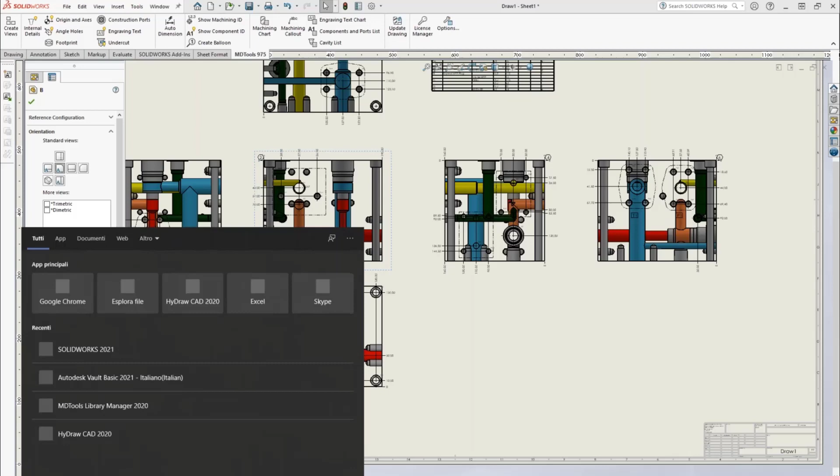Something unique of MDTools in SolidWorks is the possibility to display colors in transparency in the machining drawing. So if you want, and that's a very nice opportunity, you can create a machining drawing with colors showing the internals of the block. And that's interesting. Also, all the aspects in the SolidWorks file are preserved if you open with eDrawings. So let me open the same block in eDrawings, and that's good if you need to view the internals of the block on the shop floor.

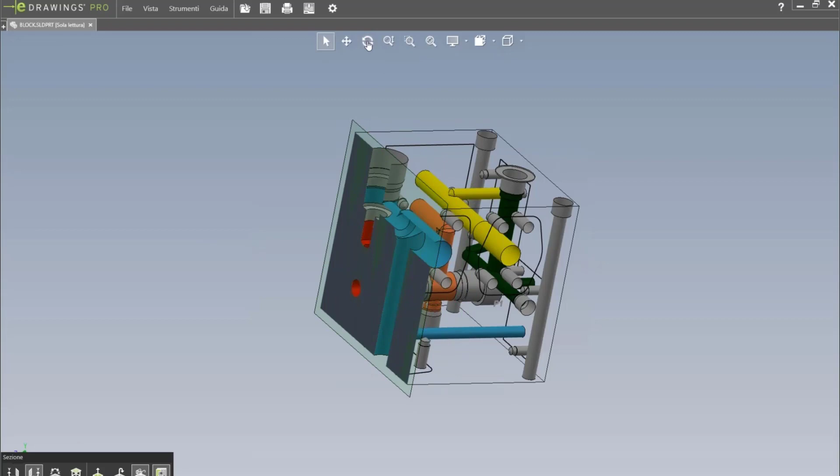So we can go to eDrawings and take our block. This is the block that we just designed. We can rotate, and we can also make cross sections according to a plane. So this is nice, because really you can check for intersections and so on directly in the viewer without the need for SolidWorks.

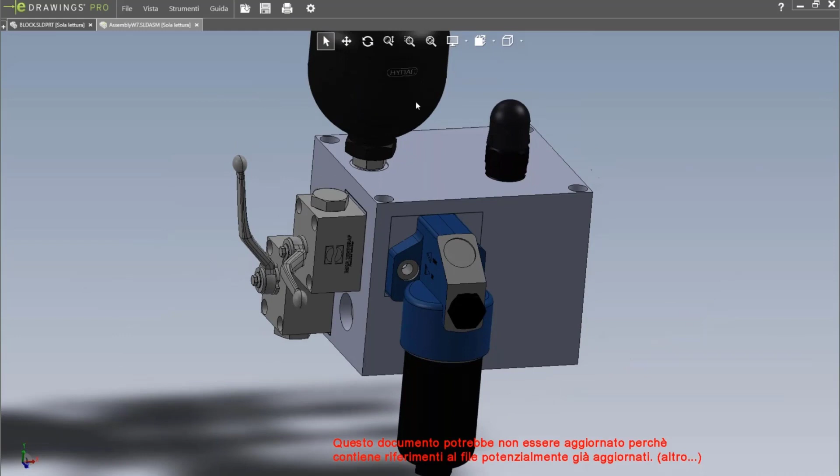This will work also in the assembly, so we could open the assembly directly. Let me do that. Let me open an assembly file, and the assembly will work as well. And if you then look into transparency, we'll see all the connections.